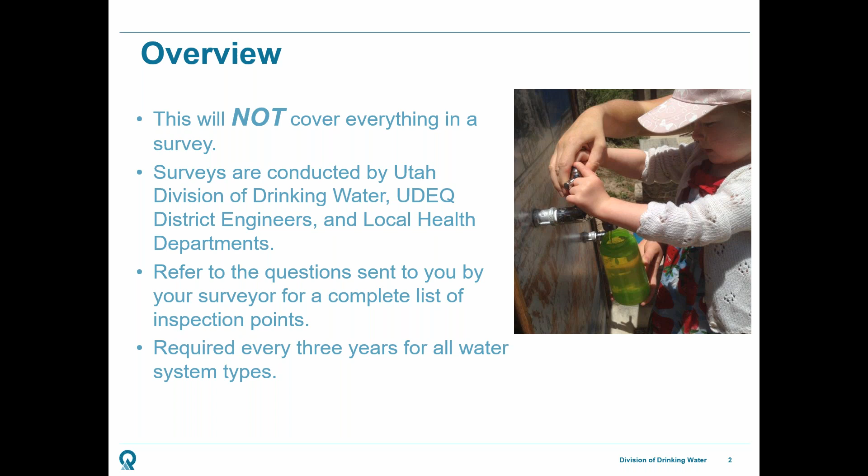What exactly is a sanitary survey? Well, the Safe Drinking Water Act requires an on-site inspection and review of 8 specific elements for every public water system to ensure the water system is protecting public health. We're going to look at sources, treatment, distribution, storage, pumping facilities, monitoring and reporting practices, maintenance and operation practices, and then operator certification during your survey.

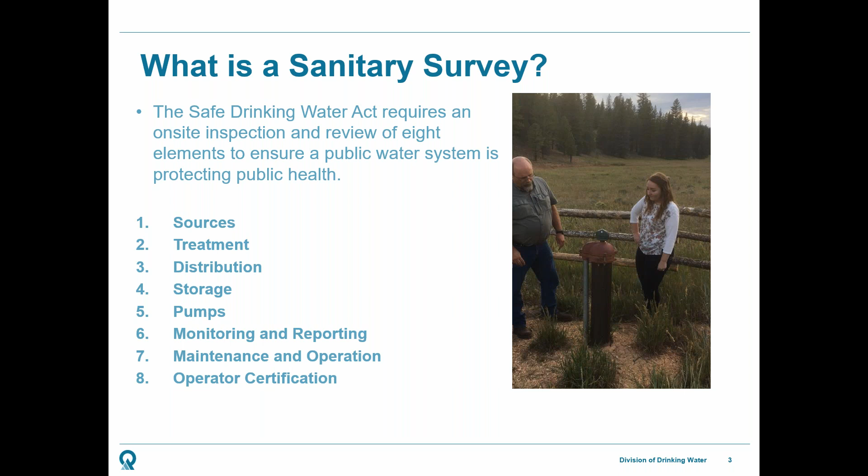Utah has a specific rule called the Improvement Priority System Rule, or the IPS rule. It's commonly nicknamed the golf rule because points are assessed to a water system for things such as monitoring violations, physical facility deficiencies, and treatment technique violations. The more points a water system has, the more likely it is to become a target for enforcement.

Points are added during a survey, and if it's a minor deficiency or a low risk to public health or a low point item, those points are effective immediately, while significant deficiencies or items that are classified as immediate risk to public health have 120 days to correct before the points are active. And that's because significant deficiencies are required to be corrected. If they are not, then violations are issued and enforcement is almost imminent for a water system, regardless of the point threshold that they're at.

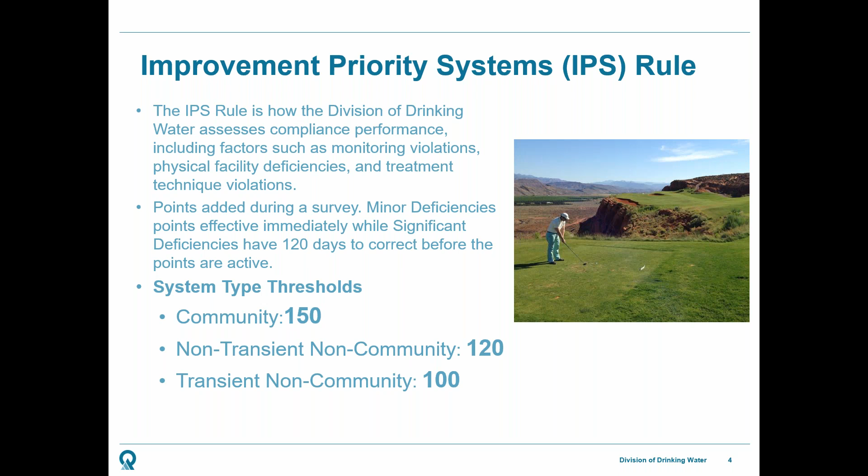Depending on the type of water system you have, community, which would be most common, residential communities where people live, you have up to 150 points. Non-transient, non-community water systems, which would be more like a workplace where someone may be there every day for more than 6 months out of the year, but they're a rotating population or they don't live there, they're not there full time, has up to 120 points. And transient non-community systems, the transient populations, people who come and go, think of campgrounds, restaurants, etc., have a 100-point threshold.

Some things you need to know to be prepared. You may only have 2 weeks to prepare for your survey. That's the minimum time that surveyors are required to give, and you may not have much longer than that to get ready for it. One of the big things to have prepared is cross-connection control program documentation. There's an increased focus on making sure the cross-connection control program is being implemented, and having documentation of those activities is essential. If you don't know where that is, you can start working now to have some of that prepared and work with Gary Rager at the Utah Division of Drinking Water to make sure that you have the documentation needed.

Keys. This is a big one. I can't tell you how many surveys I've gone on where we show up and water operators spend a significant amount of time looking for keys to access their facilities. As a surveyor, if you don't know how to get into your facility or where the keys are because you haven't been there enough, I know that it hasn't been checked regularly, and I'm on heightened alert. And it's just a waste of your time and your surveyor's time to not have those ready to go.

Perform a walkthrough of your system before the survey. A lot of the deficiencies that you're going to see here are easy to spot and fix before the inspection. Do a walkthrough, check for those things, especially some of these highlighted ones that are going to pop up here later. Help prepare your surveyor for the survey.

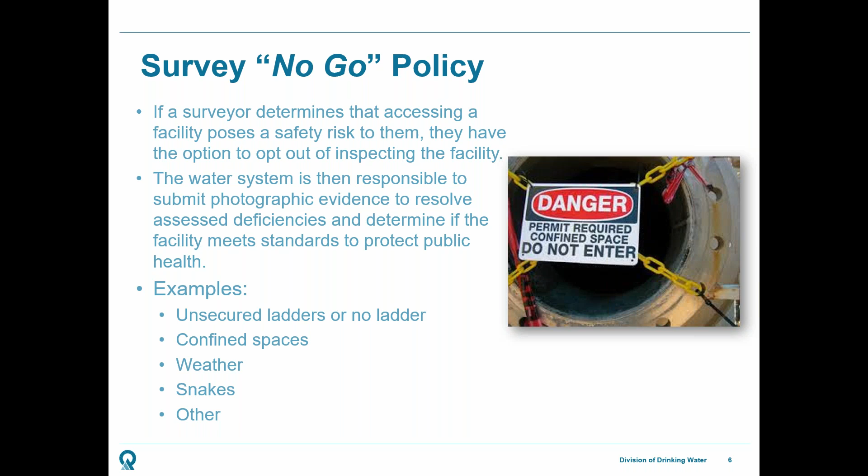Some examples, and this isn't all of them, are unsecured ladders or no ladders to access the roof of a tank. Confined spaces are a big no-go for us. Weather, if they get up there and it's lightning on the day of your survey and in an exposed area, the surveyor can opt out of that. Snakes are a big one, or anything that the surveyor can justify as to why it does not look safe to them to meet that facility. What will happen is all of the deficiencies are assessed against that facility that cannot be verified, and then the system has to submit photographic evidence later to the surveyor to prove that it's there and resolve those deficiencies.

All right, let's talk about facilities. Let's talk about some of the most common well deficiencies. These deficiencies listed above account for approximately 63% of all deficiencies assessed to wells during sanitary surveys. And a lot of them are easy to fix. End of the pump to waste line lacks a number 4 screen, well pump to waste not downturned, wellhead or well house not protected from flooding, that might be a little trickier to correct quickly.

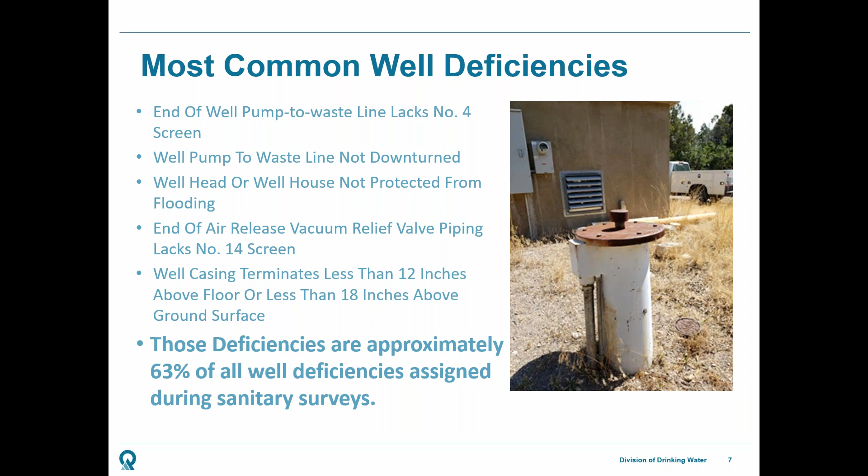End of air release vacuum relief valve lacks the number 14 screen, and well casing terminates less than 12 inches above the floor or less than 18 inches above ground surface. Some of those are trickier to fix, but some of those screen ones are pretty simple to have on hand and to be able to make sure that you're not going to get dinged for that during the survey.

Springs. The most common spring deficiencies are deep-rooted vegetation in the spring collection area. That's going to be trees right next to the spring. Roots in the spring collection pipes. Spring box lid lacking a gasket. That's a pretty easy one to have fixed there.

Unapproved source in service. That's a little trickier. That's where the source has been either deemed required to disinfect or lacks an operating permit. But that's one that if you don't know if you have, you should be able to work with your surveyor beforehand to make sure and see if there's one on file. Spring box overflow or drain lacks free fall of 12 to 24 inches.

This one is typically able to be fixed with some excavation and some digging out. I've had to assess that one a couple of times, but it's one that you could probably fix by doing a quick walkthrough. Spring box overflow lacks number 4 screen. Spring box impermeable liner inadequate or not intact. That is a trickier one.

It's one that's assessed less so now, but it's sort of if the spring box is not able to be verified. That's one that's being corrected a little bit more. And then spring box lid, not a shoebox style, and that's that 2-inch lip on there. And that's just going to help you kind of know what we're looking for in the most common one. Those account for 73% of total spring deficiencies assessed during a sanitary survey.

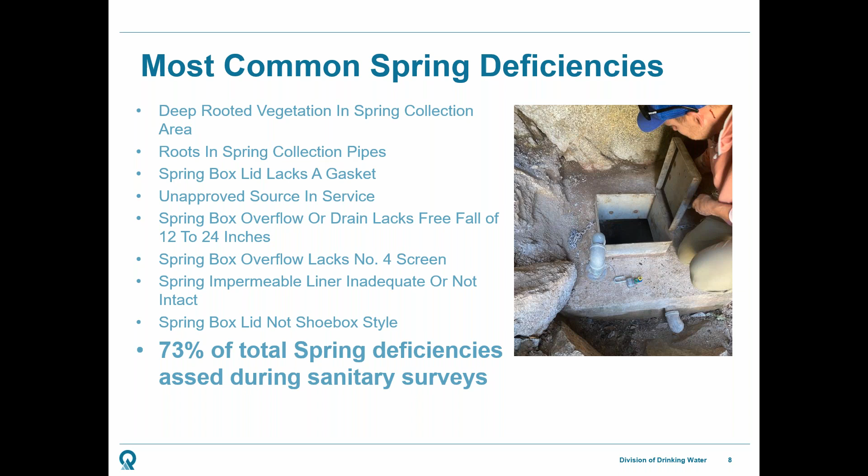another screen issue, clearance, screens, storage facility vent not downturned at least 2 inches before any opening, storage tank subject to contamination due to unsealed openings on the tank roof or sidewalls. That's a big one. If we see that, that's one that you're probably not going to be able to fix in 2 weeks, but it's a good one to be walking around and be aware of before we get there. Storage tank access opening lacks a lock. That's an easy one to fix. And then storage tank lacking an overflow.

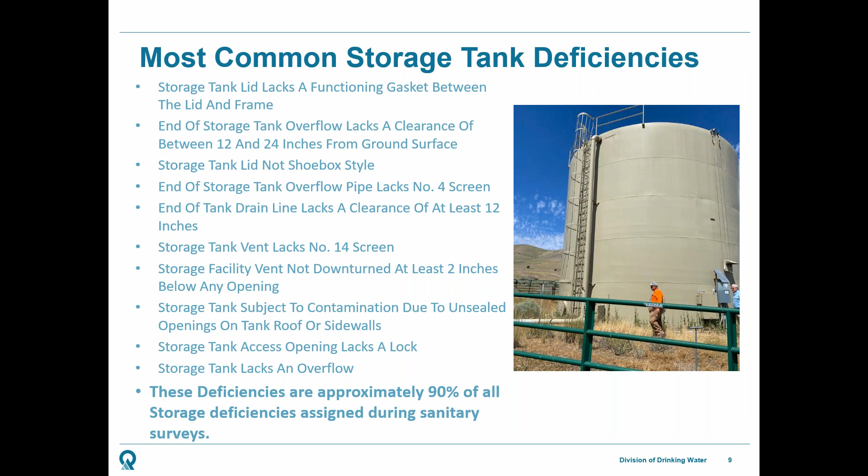The most common pump station deficiency is inline booster pump station lacks redundancy to meet peak demand with one pump out of service. That is really applicable only if the pump is being used to maintain pressure throughout the system and not to pump up to a tank. That's one that has been sort of assessed erroneously in the past, but it's a good one to kind of have awareness of. The pump station has a cross connection or is subject to contamination.

Again, unapproved facilities and service, that's a big one if there's a pump station that we discover because we come out there and it's not on your inventory. Let us know beforehand and be like, hey, I have a pump that's not showing up on my inventory when you send us out. And we can start researching that and see if there's some story behind it, or start working on the permitting process for it.

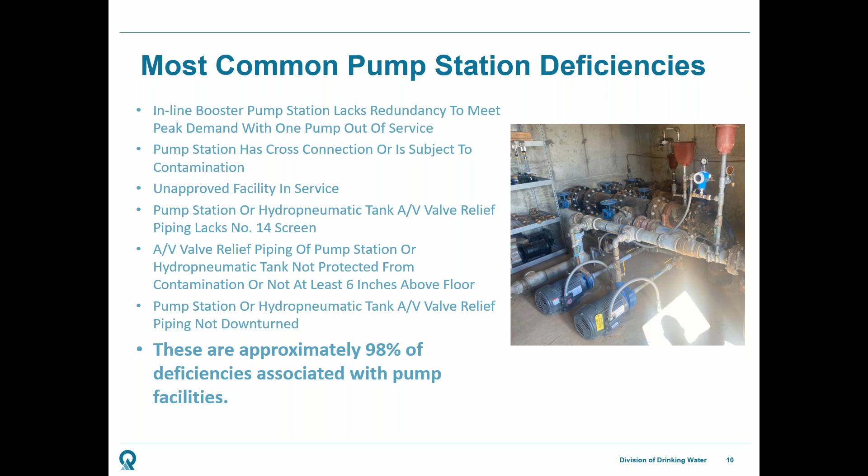Pump station or hydropneumatic tank lacks piping, lacks number 14 screen. Again, that's a big one. Contamination and 6 inches above the floor, and pump station or hydropneumatic tank air relief valve not downturned. 98% of deficiencies associated with pumps come from those.

For distribution, obviously, we're not going to be digging up your distribution system to look at it. So these vents are going to be what we're going to be looking at as we go through. Air relief valve lacking number 14 screen, air relief valve pipe not downturned, cross connections existing in a water system. If they're not able to identify that you have a valid cross connection program, or if we can identify a cross connection as we're out there doing a survey, that's going to result in that type of deficiency.

This is kind of a tricky one, but if the system lacks more than 20% of required storage capacity, that's a big one. And that calculation is done by your surveyor based on numbers that are provided to him by you. We associate it with the distribution system because it's more of a whole water system deficiency versus just a storage tank deficiency.

And then for community systems without naturally flowing sources lacking backup power for at least one source, that's another one that's sort of assessed to the distribution because it's one that's going to impact the entire water system, and having the ability to have backup power supplied to it if you have a well.

And then a community system serving 100 or more service connections lacking a redundant source. That's not going to be one that you're going to be able to fix within that 120-day time frame, but it's one to kind of be aware of: where is your backup water. This accounts for approximately 42% of all distribution system deficiencies that are associated with the actual facility.

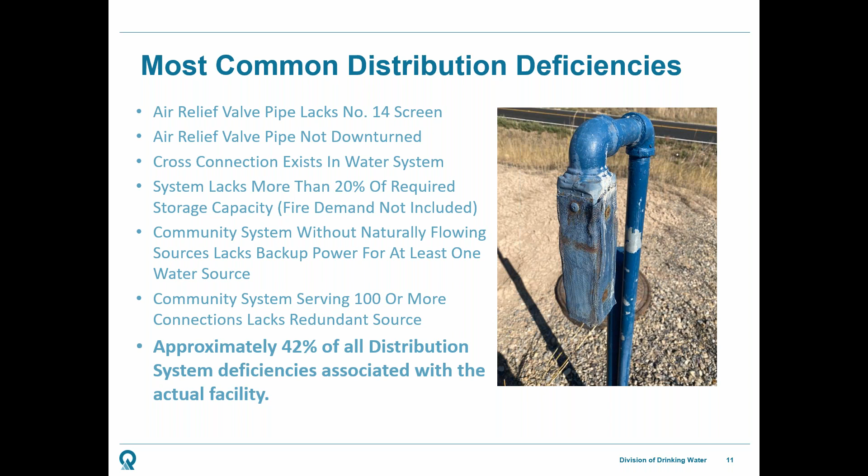There's some that we associate to the facility but are more administrative because they have to be tied to a facility, and the distribution system is what we use to represent all water system facilities, because all systems have one. For treatment, this is mostly just looking at chlorination treatment plants. Surface water treatment plants have a whole other set of surveying responsibilities and violations or deficiencies associated with it. And I specified this down just to the simplest chlorination facilities. If you're a surface water treatment plant, you can work with your surveyor directly to have a better idea of what that's going to look like.

But having a 150-pound facility and don't have immediate access to a NIOSH respirator, hypochlorite facility without means of an emergency eye wash station, feed pump starts without well or service pump running and water flowing in the pipe, lacks backup power supply for required disinfection. If you're a facility that is under a required to disinfect letter order from the director, you are required to have backup power for that.

Chlorine vent line not discharged outside above grade or lacks that number 14 screen. No means to measure flow rate of treated water. That's a big one. Be able to describe to your surveyor how you are measuring the flow rate of the water treated. The chlorine vent line not discharged outside above grade or lacks that number 14. Sorry, that one's on there twice.

And then adding chemicals that do not meet the ANSI/NSF 60 standard requirement. That is, if you are adding something that is not NSF certified chlorine to your distribution or to your treatment plant, things like store brand bleach, Clorox bleach that do not meet that NSF standard 60. Those account for about 47% of treatment deficiencies, and that's probably a little inconsistent because there are deficiencies associated with surface water treatment that would be a little bit different.

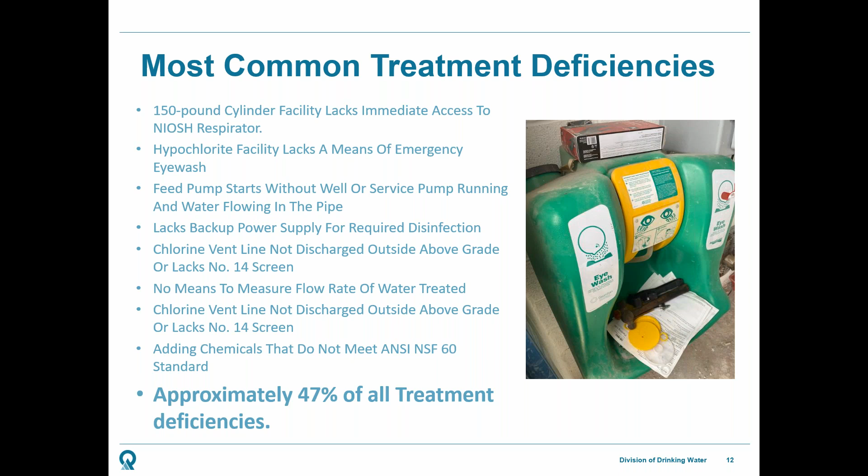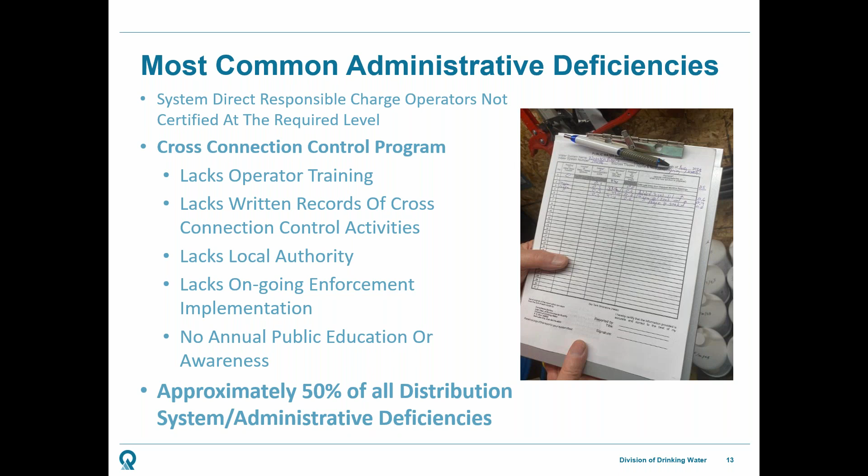Okay, administrative deficiencies. This is where we're looking at things like the operator certification, which is the number one for all of that. And then cross connection makes up a huge percentage of deficiencies associated with water systems. Have those 5 elements, the operator training on hand. If you're a community system or non-transient system, and you have that administrator requirement, written records of cross connection control activities, authority statements, ongoing enforcement and implementation, and then annual public awareness, have all of that ready for your surveyor. Those are the high level, the biggest issues we run into.

After we complete your survey, what's going to happen? Well, you should get your report within 30 days of the final day of inspection. That is our requirement to have it back to you. I pride myself on trying to get mine out to you as quickly as possible. Review that report and any of the deficiencies that were added to your water system in that report. Submit photos of the corrections to ddwips@utah.gov or work directly with your surveyor to get the deficiencies resolved.

When you submit those photos, include the system and facility names and the system and facility identification numbers and the deficiency that's being corrected. So if you come out and there's not a screen on there, take a picture of the screen, send it and say, this is my water system number. This is well number 1, WS001, and I'm correcting the screen deficiency that was assessed.

Remember, you have 120 days to correct a significant deficiency before those IPS points are active, and a violation will be issued if you do not meet that deadline. And then it becomes reported to the feds, and it becomes a candidate for enforcement. If you need more than those 120 days, and some of those deficiencies are definitely going to require more than 120 days to complete, go to requestcap.utah.gov and you can request a corrective action plan to get an extension for that correction. That is always up to the Division of Drinking Water's discretion if they issue that CAP or not, but please do so and make sure you get that in before that 120 days expires.

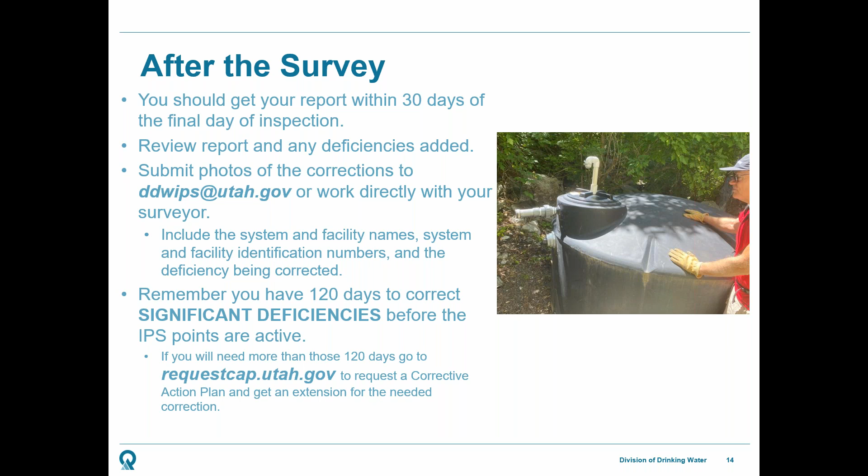If you have questions, you can reach out to the Utah Division of Drinking Water directly at 801-536-4200. Drinkingwater.utah.gov is our main website, and then waterlink.utah.gov is a website where you can see all the data we have on your water system, including inventory, IPS scores, bacteriological histories, your current IPS score and any deficiencies or violations that are being assessed, as well as your monitoring schedule.